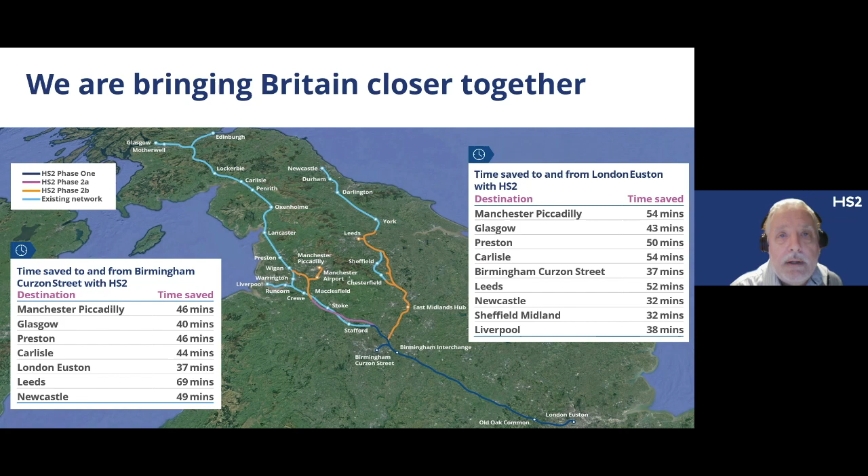It will provide people with more opportunities within reach to live, work, study or holiday in different places. So today we're going to be looking at tunnelling, and the webinar will show you where the tunnelling is taking place on the Phase 2B Western Leg.

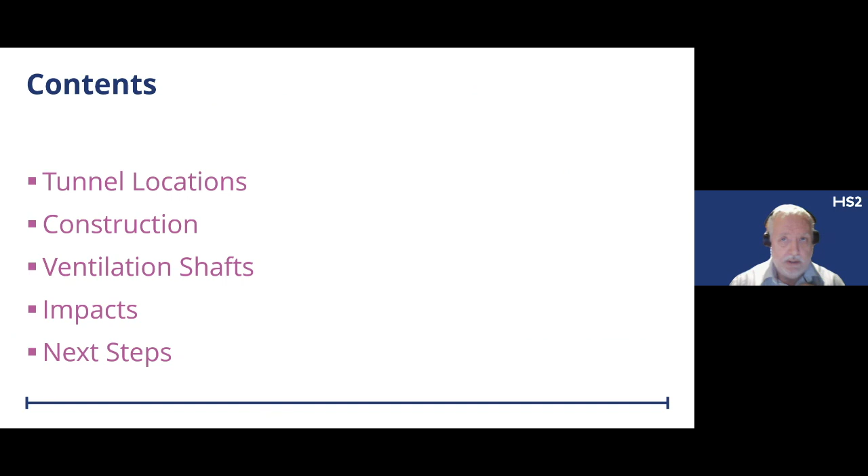We're going to look at how we intend to construct the tunnels, including how we're going to dispose of the excavated material. We'll describe the ventilation shafts which appear above ground along the line of the tunnels, what they're for and what they might look like. And we will talk about how the tunnels might affect you and your property before closing down with a few comments about where the scheme goes from here.

So the tunnel in Manchester is the longer of the two tunnels on the western leg at 12.8 kilometres, and that's about 8 miles. There'll actually be 2 separate bores, one for each direction, and each of those will be about 7.5 metres in diameter, about 26 feet. There will be 4 ventilation shafts, and there will be porous portals at either end, which we're going to talk about later. So the trains will be slowing down as they approach Manchester Piccadilly, and the design speed of the tunnel is 230 kilometres an hour.

The tunnel begins at its southern end, just after trains have left the proposed HS2 Manchester Airport station heading towards Manchester, and it emerges just before Piccadilly Station in Ardwick. The Crewe tunnel is about half the length of the Manchester tunnel with 2 ventilation shafts. The trains using the tunnels will be travelling at high speeds here, and the design speed allows for 360 kilometres per hour with tunnel diameters of 8.8 metres. That's about 29 feet.

So the Crewe tunnel marks the starting point of phase 2B on the western leg and begins just south of Casey Lane in Hough. And it passes underneath the town of Crewe, although tracks will be built above surface too, to allow some HS2 trains to stop there. The tunnel emerges in cutting alongside the West Coast Main Line near Broughton Road.

So specially commissioned tunnel boring machines, which we'll refer to as TBMs, will dig out the tunnels, and they're tailored with state-of-the-art technology to cope with the specific geology in their area and to minimise construction risk and ground movements. In Crewe, the TBM will start at the northern end of the tunnel between the existing West Coast Main Line and Broughton Road, and it will work its way south underneath the town.

The earth which it digs out will be taken on a specially built conveyor belt further north to the site later to be used for the rolling stock depot at Wimboldsley, where it will be stored for future reuse or removal. The conveyor belt will be enclosed to limit noise. In Manchester, digging starts from both ends of the tunnel, and material dug out at the Piccadilly end will be moved away on freight trains from sidings in Ardwick. At the Manchester Airport station, excavated material will be moved off-site by road via the M56 Junction 7.

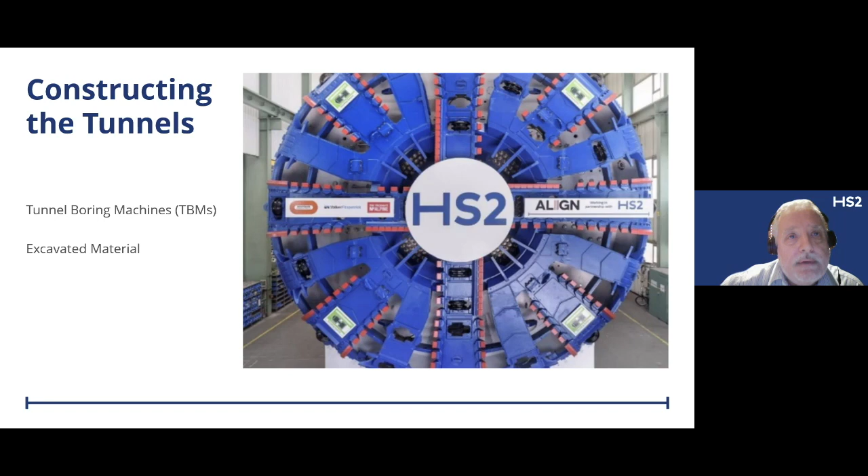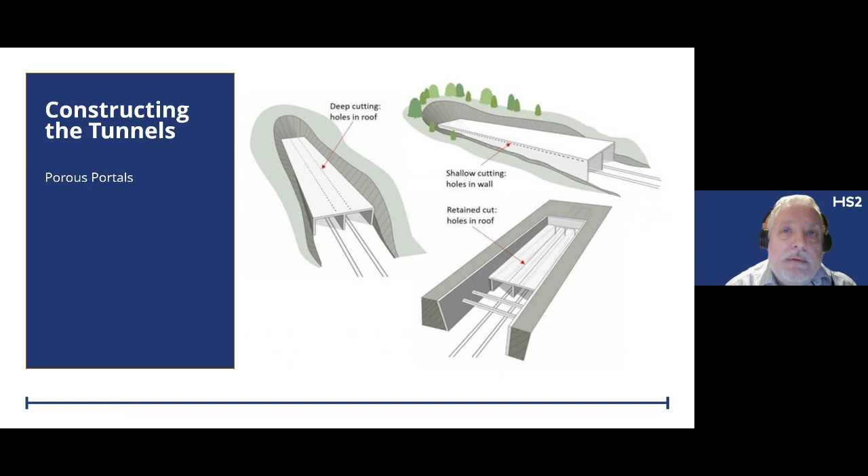Now, I mentioned porous portals previously, and that these are constructed at the entry or exit sections of a tunnel. The portals have multiple small openings in the roof or walls of the structure to control noise and air pressure, and they act to dissipate the pressure wave which is created when the train goes in and out of the tunnel, muffling the noise of the train at this point.

So, as I said before, each tunnel will have a number of ventilation shafts. So there'll be 2 ventilation shafts on the Crewe tunnel. One will be at Cowley Way, just south of Crewe Station, and the other just off Middlewich Street to the north. And in Manchester, the tunnel has 4 shafts at Altrincham Road, Palatine Road, Wilmslow Road and Birchfields Road.

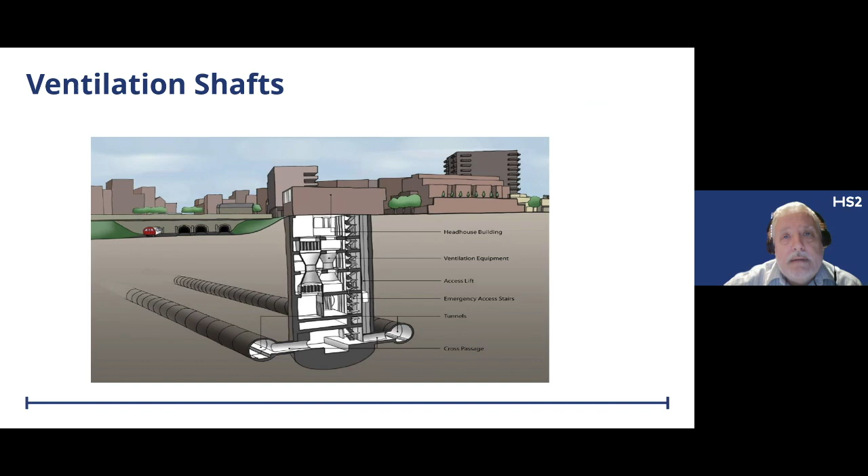Buildings on the surface, called headhouses, form the entrance to the shafts. They're designed to be sympathetic to their social setting, and they're typically about 25 metres in diameter and usually 1-storey buildings. And on the next slide, we're going to show some current examples.

Because we know that the community expressed a lot of concern over the head houses for the vent shafts, and final design for the head houses are quite a way off yet, but we'd like to reassure you that we will continue to work closely with the community as we develop these.

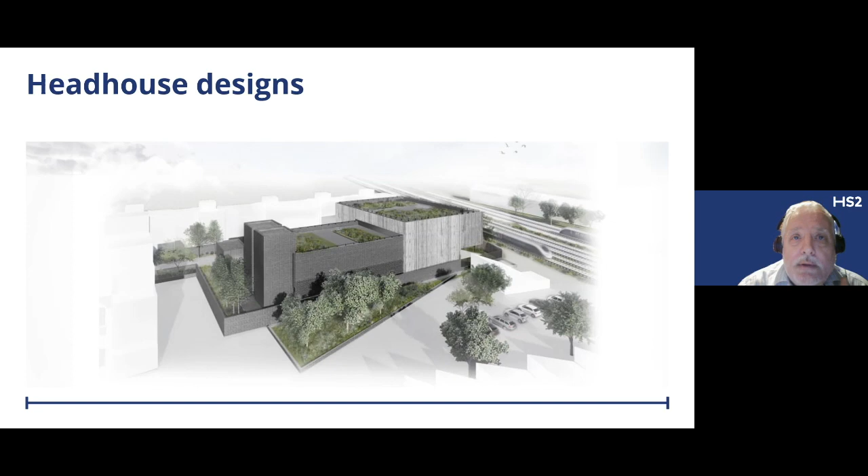And the slide currently on screen shows a head house for HS2 in London, and this is in the South Kilburn area and part of a 4.5 mile long tunnel that runs between Euston and Old Oak Common. So it's a very similar urban makeup as we have in Manchester.

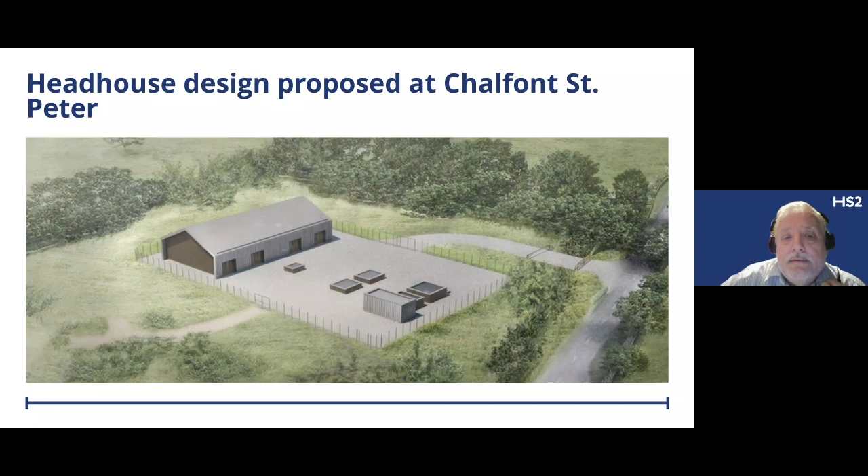From the various events and consultations which we have held during the design process, we've heard concerns expressed by the public about ground settlement. So will the tunnel affect ground stability where you live? About noise and vibration during the tunnelling itself and from trains running in the tunnels after it is built. And concerns generally about property by people who live above the tunnels. So let's have a look at those 3 points in turn.

Firstly, ground settlement. And based on past tunnelling experience in the UK, what we can say is that ground movements are predictable, they're controllable, they're too small to affect most structures, and they're steadily reducing in magnitude over the years as drilling technology improves and our early ground investigation works gives us an increasingly accurate picture of the structure of the rock below ground.

So our contractors will insert pre-built concrete segments to support the tunnel immediately after excavation and deploy an array of safety control measures to minimise settlement. Buildings and other infrastructure above or in the vicinity of the tunnels and shafts will be closely monitored during construction.

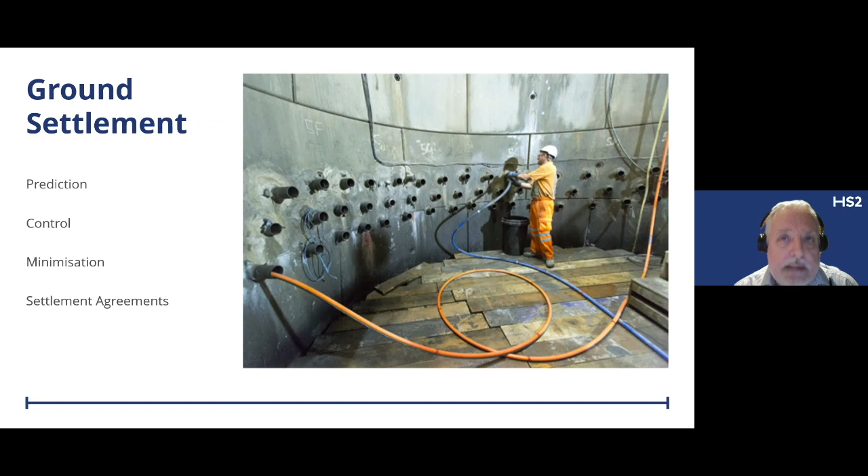And on phase 1, we've entered into agreements with property owners whereby we can record the existing structure of the building and compare the same building after tunnelling work has been completed. These have been made available to anyone within 30 metres of the centre line of a subsurface route, and they provide further protection that any damage caused will be resolved by HS2.

If you live above the line of a tunnel, you may be concerned about the levels of noise and vibration. However, the tunnel boring machine will be up to 40 metres below the surface, which is far lower than most tunnels on the London Underground. Even during tunnelling directly below a property, noise or vibration will be short-lived and very limited in nature.

Construction noise and vibration effects due to tunnelling work will be avoided through the implementation of the HS2 Construction Code of Practice, which sets out strict operating guidelines for our contractors on reducing all environmental impacts. Operational noise, which is when the trains are running, is being modelled at the moment, and any potential effects will be mitigated, and our mitigation will be set out in our environmental statement.

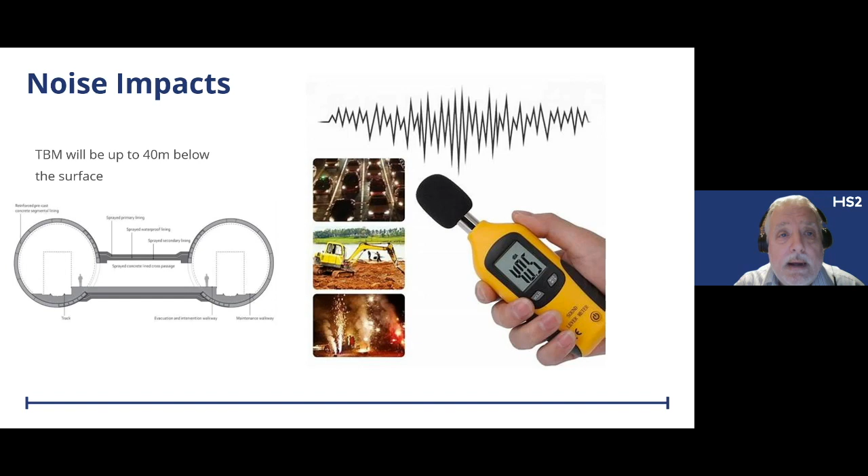Property: the line of our tunnel is protected from future developments, and any planning applications along the line which involve significant digging below ground will be referred to HS2 by the local planning authority for our consideration. I stress that routine development above ground, house extensions and the like, are not a concern. This process is known as subsurface safeguarding.

Our safeguarding of the tunnel line will show up in any property conveyance, and the potential buyer will thus be informed about the tunnel before it is built. Some people have expressed concern that prospective buyers will be put off by the prospect of the tunnel and that they may have difficulty selling their properties as a result.

But as we've explained before, the engineering evidence is clear that the tunnelling will have no material impact on the properties above it, and a potential buyer should have no logical reason to be deterred from continuing their purchase. Taking London as an example again, the deep level tube lines are about 24 metres below the ground.

But in some stretches of the Central line, for example, this can be as little as 6 metres, just below the utilities depth. The tube trains pass unnoticed from above, and there has been no impact on property values recorded as a result of the underground network. In fact, on the contrary, house prices are significantly boosted as they're near a tube station.

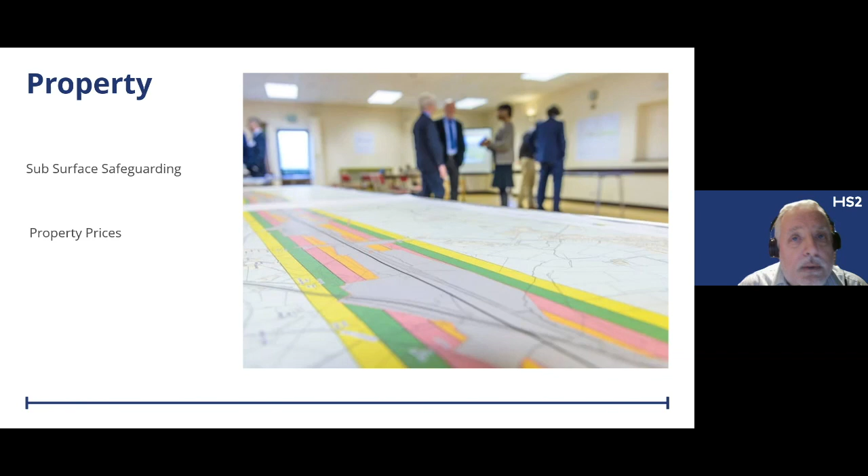Should say that there's a nominal fee of £50 paid by HS2 to you if you're a freeholder affected by subsurface safeguarding. Look at some of our timescales now, and it often seems as though HS2 has been with us for a long time, but in some ways we're still at the start of the journey to completion here, particularly here in the Northwest. So whilst phase 1 of the scheme, that's the bit from London to Birmingham, is now being built, our section, phase 2B, is still in the outline design stage, and we have not yet submitted a bill to Parliament seeking authority to construct.

We'd expect to be able to do this in early 2022 or sooner if possible, and the parliamentary review itself is a lengthy process and can make further changes to the design based on petitions it receives from the public. We would expect royal assent in 2024, and we expect construction to be complete between 2035 and 2040. So that's our overview presentation on tunnelling. And Helen, I'm going to hand over to you now, and hopefully we can have some questions and answers.

Thank you, John. Thank you all for joining us today for today's session, which I hope has given you a bit more of an insight into some of the work we're undertaking and why we're doing it. As John says, we'd like to open the session up for some questions now. Firstly, I'd like to introduce our panel. We have joining us from HS2 Limited, Rob from Engineering, Andy from Tunnelling, Carol from Engagement. From the Department for Transport, we have Peter in the policy team, as well as Tom and Cameron, also from the policy team. As Jonathan mentioned earlier, we'll answer as many questions as possible given the time that we have.